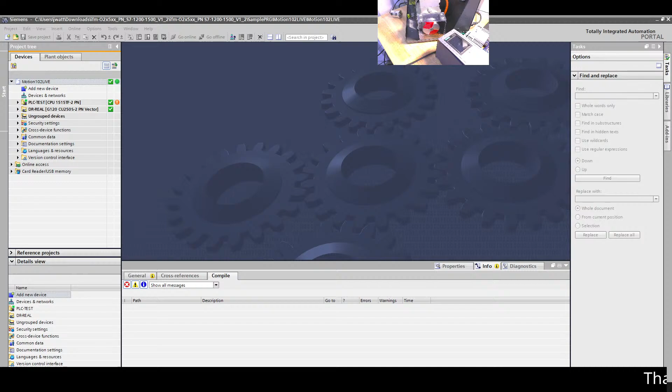But yeah, so let's jump in, and I'm going to swap over to my portal here, and let's see, do I have my face? Can I get my face? Yes, look at that. So hopefully that doesn't cover up too much of the screens, and you'll see here in a second that we're going to be doing a lot, because we're going to be talking about virtual axes. We're going to be talking about the concept of virtual axes. We're going to be implementing a virtual axes on a real system. So as you can see there, I have a 1515. Here's the device, and it works here.

I've gone ahead and cheated a little bit, because I thought I was going to impress you by setting up everything really fast and not impacting the live stream that much. Well, one, I realized that isn't that impressive, because I've done that quite a few times, setting up technology objects and drives, and B, it still took a long time.

We've got probably a good at least 2 hours of material that we're going to be going through on motion control. So virtual axes, we're going to be doing absolute gearing, looking at some tracing on that sort of stuff, and then we're going to be doing some camming, and then we're going to be talking about all sorts of other stuff in the bonus time.

So I've already got a little system here set up, and just checking to make sure that you can see everything, and clear that out.

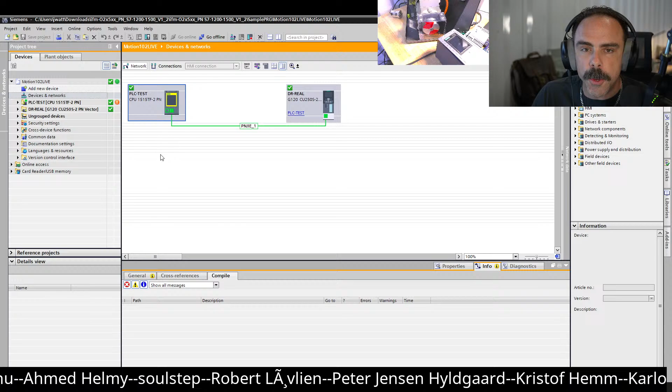So what we've got here is a 1515 TF processor. We're not going to be using the safety functionality, only the T functionality. Just if you're not aware, you do have to have a T processor in order to do all of the functions. Well, not all of the functions. You can do a virtual axis on a regular processor, but you cannot do absolute gearing and camming. And so what we're going to do...

I'm actually going to bring up something that I forgot to set up here a second ago. Where is it? Here it is, our little drawing thing. Let me make sure that I can draw. Y'all see that? Yes, sweet. Okay, got it cleared and got me back to my thing.

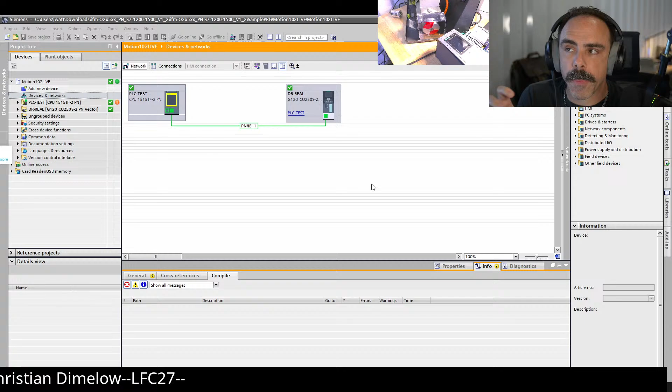All right, so again, we're going to be talking about these motion control topics: virtual axes, absolute gearing, and camming. So we've talked about in the Motion 101 class, we talked about gearing, and that would be synchronizing two motors together as if they were physically geared together. And we have a gear in function called MC gear in.

And that is what we talked about in that Motion 101 class. Here, we're going to be talking about MC gear in pos, so position gear in. Whereas the MC gear in just takes and doesn't actually locate via position, you can't do anything like phase shifting or anything like that. MC gear in just takes you, and whatever your leading axis is doing, it will just spin up and then move into your following axis, and you can have a gear ratio and everything. But I'm going to show you the difference between what we're doing with that.

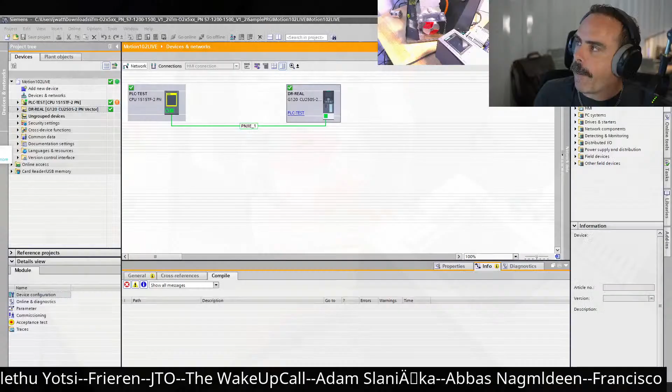So a little bit more about our setup here. We've got a G120 with a CU250S with an encoder. So you can kind of see it, I'll click over here. You can't really see it, but there is an encoder on that G120, and you'll be able to see that wheel move.

I've already got the 1500 downloaded with a basic program, and so we are going to be pulling in this here, and we're going through. I'll show you the basics program we have.

We have a leading axis technology object, and I've gone through and just done the basic setup on it, because we've gone through, and it took me a little while to tune to try to get the best out of this motor. This is a really old 4-pole motor that is, I guess, not the best of quality anymore.

So you're going to see that motor kind of hop between at lower speeds. It's going to kind of be a little bit jerky, but just know that I've worked in order to get it tuned as best as possible.

Remember, this is a G120, so this is an induction motor, a 4-pole induction motor. Very simple. But one of the things about doing these technology objects that we're going to be talking about today, you have to have an encoder. The G120 can absolutely do encoders. You have to have a CU250S. So I have a CU250S-2 Profinet version, and you can see that it is set up here.

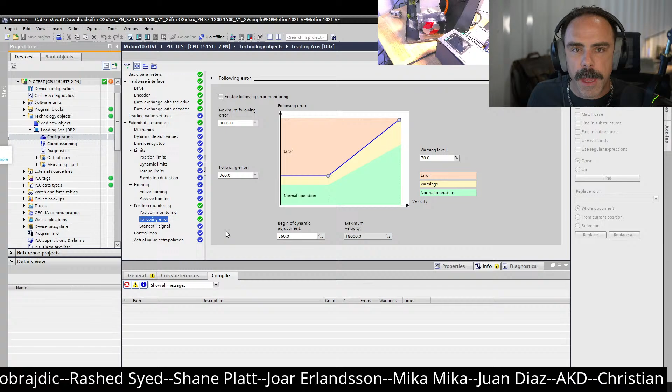I've disabled the following error on all of these, and following error is going to be one of the things that trips you up the most in getting these systems to work. Following error is the difference between the set point and the actual value. So if this blue line is the set point trying to ramp up, and for some reason your motor cannot speed up that fast, you get an increasing following error that continues to get bigger. That's what following error is, and there's a threshold that will fault out your technology object.

In a real system you would want that, because it signifies you're trying to accelerate too fast or you're under too much load, something like that. It means you're not actually following how you were supposed to be following, and that'll be very important when we talk about virtual axes, because you're assuming your motor can follow as quickly as you are telling it to.

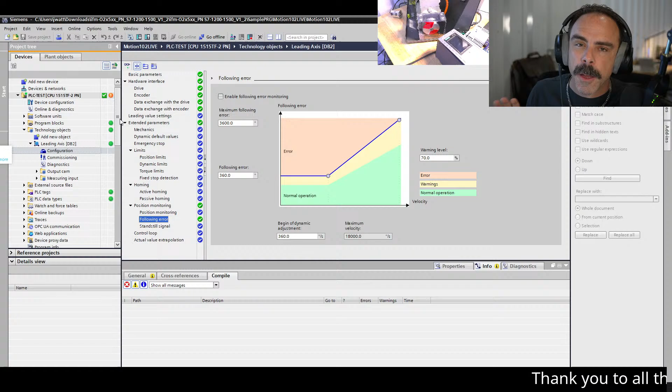So I've disabled following error on this, and I'll go through and explain some of these terminologies and things like following error, and we'll have standstill monitoring, some things like that. But in general, I'm going to assume you've watched the Drives 101, Drives 102, Motion 101 classes, so you generally understand the concepts of drives, motors, encoders, and things like that. If you're not familiar with those, you might be a little confused on the live stream, but there's a lot of information about that on other streams.

So we've got that leading axis set up, and in my program structure I have a function call called leading axis control that I'm calling from my OB1. This leading axis control has my basic MC power, MC reset, MC stop, and MC home for my leading axis. This is all the stuff you need to control a motor using technology objects. Every motor is going to have some version of these, and we're going to find out later that we need this MC home in order to actually get anything going.

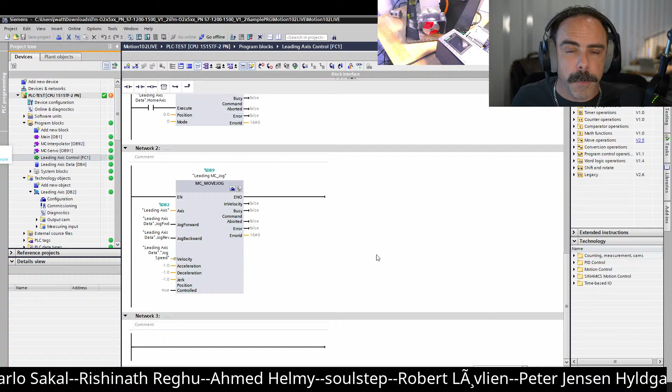What we have now is the second thing we're going to be doing in order to move our leading axis. We're going to be using the MC move jog, because one thing about a leading axis, especially the way we're going to be doing it, is it can be doing any number of things, but the concept we're using is what's called a virtual shaft, or a virtual leading axis. A lot of systems will be looking at a master value, and then you'll have multiple motors all gearing onto that one master value, so it kind of syncs up, and those multiple motors are doing their own thing.

What's really cool is that there's an analog, mechanical system, that previously, before you had PLCs and all this other technology, you would actually have to mechanically link motors together.

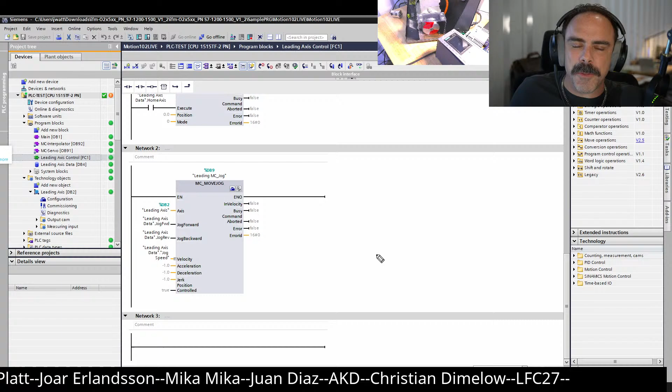One of the coolest things I've ever really looked at is a system in a very large house. It's Vanderbilt's, who was involved in railroads in the U.S. and the early U.S., and he was kind of like the world's first billionaire sort of person, or at least in the U.S. He has a house called the Biltmore, just outside of Asheville, North Carolina. If you're here in the U.S.—if you're not, who cares—it's kind of like a little castle, like a Versailles castle, just not quite as old. In the kitchen of this Biltmore building, which was built in the 1800s, there are these big mixers and pieces of equipment they're using way back in the 19th century. The way they do it is they have a big steam-powered drive, an actual coal-fired steam powered plant, and this powers a shaft that rotates.

Well, if you have like a big mixer or something down here, what you would do is you would have a belt, like a leather belt, and there would be a pulley on this shaft, and then a pulley here on this shaft, and you would literally take and loop this belt over, take it physically and flip it over and lock it onto and pull it and lock it down, tension it down.

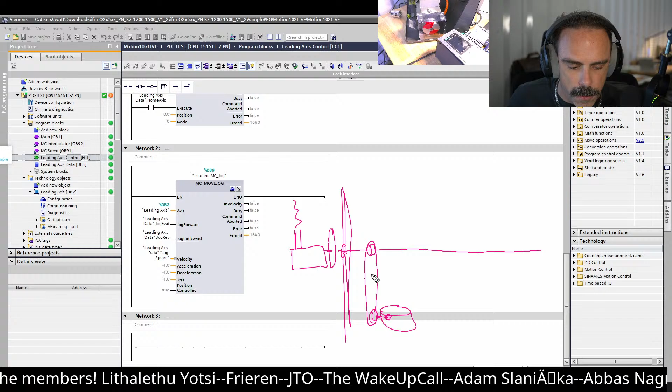And this large steam engine that was outside the building is powering this shaft, and then you can kind of turn on and off equipment, and then this would start rotating. Really cool. Cool thing about it, if you wanted to change the speed of this device, you would change the pulley. You would change that thing.

And so what you would do is you have this steam engine outside powering this shaft, and you would be gearing on and kind of syncing up and syncing off all of your equipment. And you could have multiple of these pieces of equipment running off of this single shaft.

And that is the concept that we're going to be doing, except we're not going to be using steam power. We're going to be using a virtual leading axis for this. And we're going to base that off of a real leading axis. So the first thing I'm going to do is I'm going to clear this out, and I'm going to show you that we actually have control of this motor.

And I have a little data block here where I have just connected up the axis, jog forward, all the power resets, everything is connected up into a little data block that just has all of this stuff in it. And the reason why I put it into a data block is because in data blocks, if you didn't know, you can monitor them, and then you can just double click. First time you have to say yes, and you can't hear it, but I can.

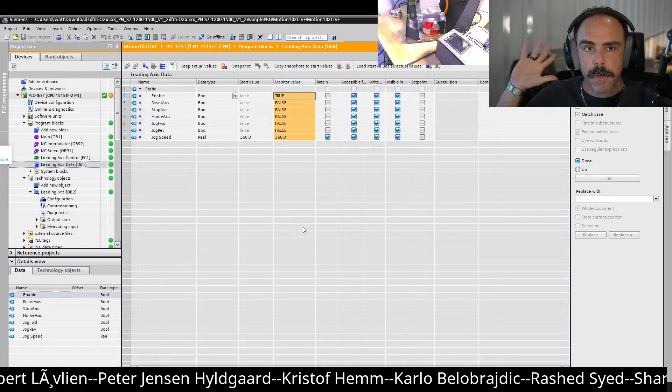But back behind me, the motor is sitting there. So kind of look over here, and when we jog this forward, there you go. It's actually moving. Look at that, chat. I actually know how to turn a motor. I'm not lying to you. I have experience.

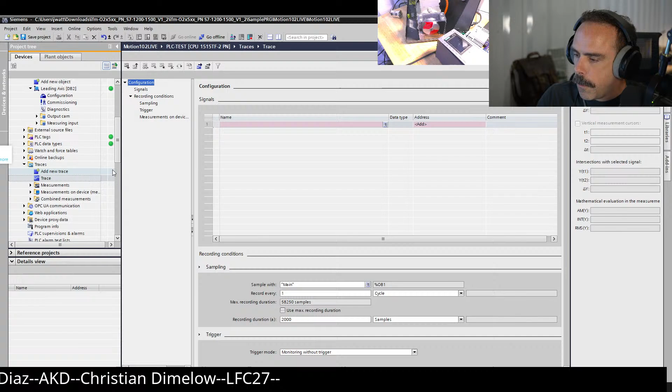So we've got this thing going, and I want to show you real quick, because we're going to be using a trace function, how to set it up. We're going to add in a new trace, and we're going to click on our leading axis, and you notice I have my details view pulled up down here. We want to pull in, well, I guess our velocity. No, I want my position. Where's my position, chat? There it is. Our actual position. We're going to drag this in for the leading axis. So leading axis dot actual position.

We're going to go to sampling, because this is very important. The technology objects, when they are running, are being calculated in an organizational block called MC servo. It is not main. Normally, if you're just running your regular block, you're going to sample your traces from main, because that's where all of your general information is getting calculated. Well, these technology objects are getting calculated in MC servo, which is independent of your cycle time. It's a set cyclic block.

So we want to make sure that we are looking at the same data, and we're just going to say use max recording, record every cycle, and you look at this, it's about every 4 milliseconds. We're going to save that.

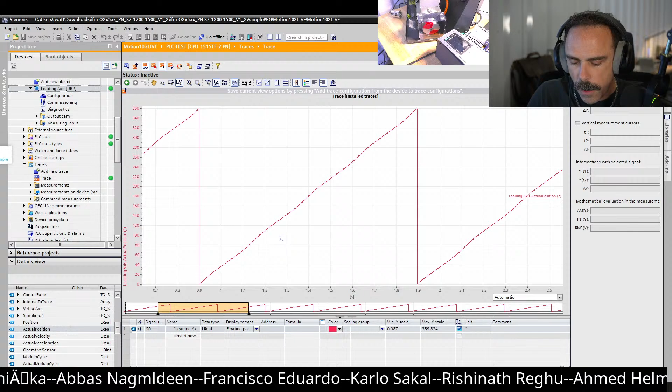We're going to download that to the processor, and then we are going to record that. And what you will see is we have a sawtooth wave, okay? And we're gonna stop it, and we're gonna talk about what this is. So we're gonna go through and zoom in on one of these, and you can see that the effect of the cogging that I was telling you about is there.

So what this is representing is on our y-axis here is the position of our drive. So remember, I set my modulo to 360 degrees. That's why you never see anything over 360 degrees, because it's always rolling over. And so you see it, once it gets up to 360 degrees, it immediately jumps down to 0 and then starts just kind of wobbly.

Remember, it's a crappy motor, but wobbly going up at a fixed speed, because we're jogging at 360 degrees per second. So we should be able to go in here and clear this out. And if this is at 0.9, this should be at 1.9, because we have 360 degrees per second. So that's how we're going to interpret this graph.

We're going to come back to this here in a second, because we're going to be doing some gearing and camming and different things, and this is going to be the core graph that we're going to look at. So what you will see in these motion control systems is this sawtooth pattern: up, straight down, up, straight down, up, straight down.

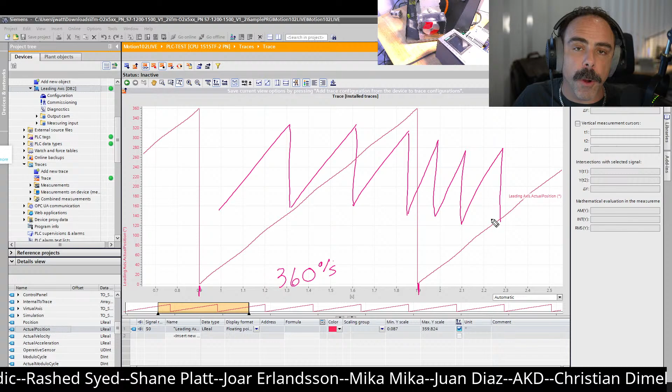So if you increase speed, you will tighten up how many sawtooths you get per second. Because if we were to double this and say to go to 720 degrees per second, we would have 2 of these cycles in the same time period that we have here. Now, that's a lot on screen, but fairly simple. Just wanted to make sure to talk about that and everybody kind of understands that.

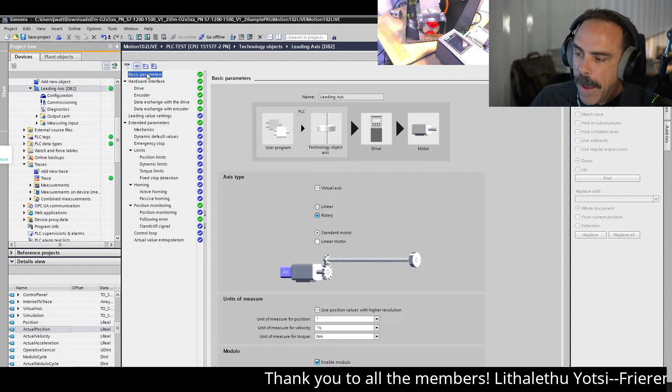So we have got this, and now we still have our motor running back there. So what I want to do is to now create this real axis into a virtual axis. And so I'm gonna stop monitoring this. I'm gonna minimize that. And first thing we're gonna do actually, is we are going to turn this drive off. And we're gonna change in our configuration, in the basic parameters of our technology object. We have a running motor set up exactly how we want it. We just click this virtual axis checkbox. We're gonna save, and then we're gonna download.

Problem is it will not let you make this change while the processor is in run. So what we're gonna do is we're gonna hop over here. We're gonna click here. We're gonna go to online tools. You can barely see it. It's underneath my face right here. And then I'm gonna stop the processor. And then that way, when I come back over here and then download this change, it actually takes it. So compile, because if I didn't stop it right here, it would say, hey, guess what? You can't do this while it's running. And so I'm gonna click start module. And so it's now back in run.

So now I wanna go do the exact same thing. I'm gonna enable this axis, and you can't hear it, but nothing happened back there. And then now I say jog forward, and nothing's going on. As you can see, look, nothing. But if I go to my same trace, the exact same trace, go online, and then activate the recording, what we'll see is, guess what? We still have this leading axis moving virtually.

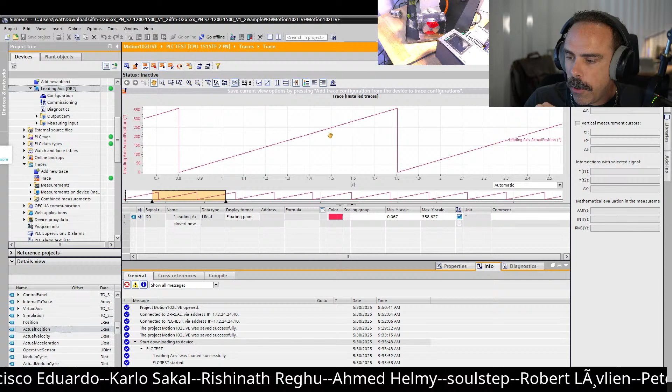So we're gonna stop this and look at this. We've zoomed in. It's still 1.8 exactly, but look, all of that ripple that was there before because of the crappy motor is gone. This is a perfect signal. So a virtual axis gives you a perfect signal. And that is very important to realize, that when you are working with these multiple axes off of a virtual master, you want to have as good of a signal as possible.

Now, sometimes you can't avoid using a real axis as the leading axis, but if it is at all possible, it is better to give yourself a perfect virtual signal and then gear on and tie off of that. Because if you have a little bit of ripple in your signal here, in a second, we're gonna gear that real axis onto our leading axis. And so it might have a little bit of instability around this axis.

Well, imagine if it was trying to follow a real axis, it would be putting the ripple onto a ripple. So you'd be adding ripple onto ripple. And so it would just not be good. So that's why we use a virtual axis if at all possible.

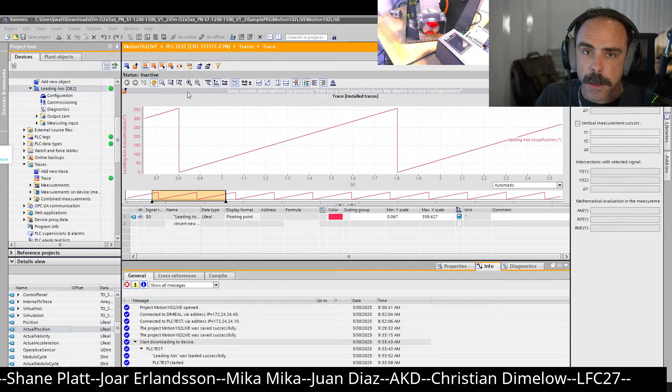There are definitely cases where you would need to use a real axis and look at the feedback from that real axis. And in those cases, you want to make sure that it is following as tightly as possible, because any error that you have in that system is going to compound and kind of make things real bad real fast.

So I'm gonna take a little bit of break. So by the way, I have a new camera and I haven't quite figured out how to get the camera to not overheat. I've probably got some setting wrong on it, so it may just kind of crap out, and so we may lose my feed on this. I'll disable it and we'll continue on, let it cool off, and then I'll get it back going. But just know that if y'all see me kind of frozen, but everything else is still going, it's just because my camera died.

Yeah, so Ignatius is another one of the long-time chatters in chat, and I call him my general. He's my greatest general, because he's out there preaching the news of Siemens, and he's talking about a real packaging machine that he recorded from yesterday, and he's put it up into our Discord. We'll probably look at it. Let's see what we got here. Yeah, when you get that up, Ignatius, I'll see about putting it up here, because it is very, very cool to look at different machines.

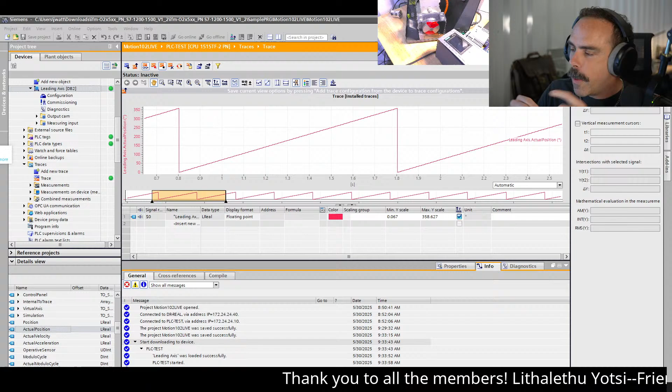May put that towards the end of the stream, because packaging machines are very much using these types of processes. You set your speed, like your line speed, with your virtual axis, and then your cutter, your wrapper, your labeler, all of those are geared off of that master line speed. So if we wanted to speed up 10 different axes, all we would have to do in our case that we're building up is change this value here. We would just have to increase that speed.

So what we're going to do now is... That's loud. By the way, this is a shared warehouse space, so it might get a little loud and you can hear stuff in the background. Oh, Ecuador, awesome. So Teddy's from Ecuador. I know Ignatius is from Africa. I think we've got some from Saudi Arabia. I know we have some chatters from Finland that's been in here a lot. Norway, Poland. And I know I've seen some from Singapore, maybe not Singapore, Thailand, and Southeast Asia as well.

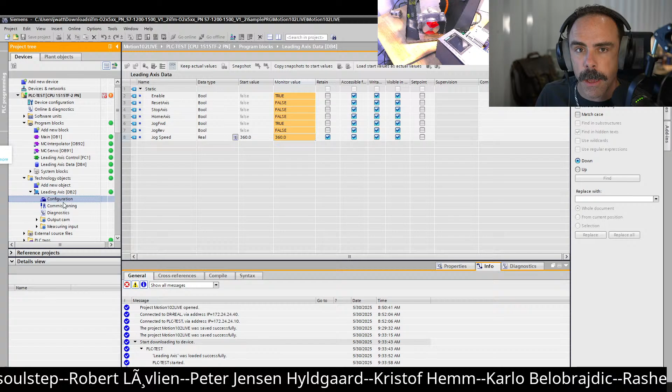So let's go through, and what we're gonna do is add in a second technology object, and because we are going to be synchronizing these objects to this leading axis, we're going to make a new object. First of all, though, we have to disconnect physically from this mechanical system. We have to disconnect our configuration from here. So we're going to go to our drive, and we're just going to select all and delete here. And because we have it selected as a virtual axis, I've just removed the connection for the leading axis from our actual system.

And so what we're going to be doing is making a new axis now. Yeah, so I'll show you in just a second when we get it geared in. We'll increase the speed. I'll show you the increasing of the speed. So we're going to call this real axis, because this is the real axis. And we're going to make it a technology object, TO synchronous axis. And we're just going to make that.

Oh, awesome. Mika, I never realized you were from Syria. That is awesome. We have some Greece. Wow, that's awesome. I love the international crowd that we have here.

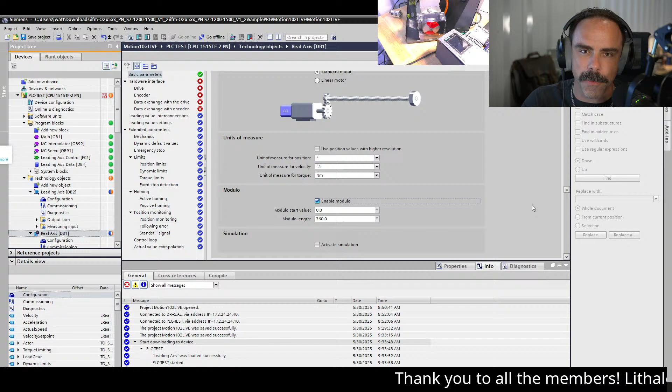So we're going to change this to a rotary axis. We want to set this up with the same modulo. It just makes life easier. You don't have to do that, but the default settings on camming and stuff don't really work that well. You'd have to massage more, and if I was having to go through all of those different settings, it would be a very long stream.

So yeah, I'm just looking over. By the way, I have this large screen over here that has all of my other windows, and I've got Discord pulled up, and I see where Ignatius is uploading the videos and everything.

So what we're going to do here, we're going to go to our drive, select drive. Because I have it already set up, we're going to have to get to the standard Telegram 3, and that's it. Remember, we're going to disable following error just to make things easier. Depending on when we activate the gearing with its basic technology, it can jump around. So that just avoids some nuisance faults.

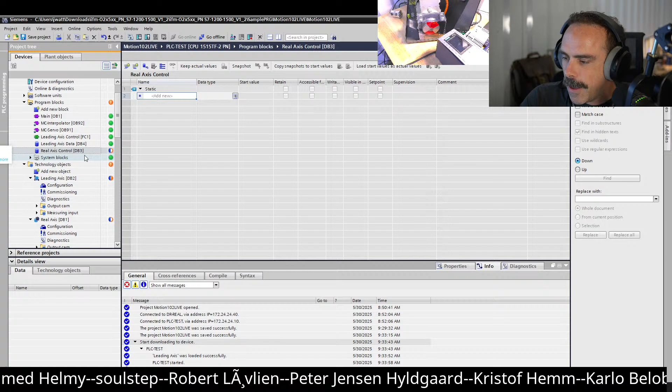Yeah, so that's all we need in the configuration. Now we're going to create a new function call called real axis control. I'm not a smart man. Always check to make sure that you actually are creating the block that you want. So we want a function call called real axis control. Okay, and we're going to have our setups. I know I'm blowing through this. I've done this many times before on other streams, and I talk about each one of these.

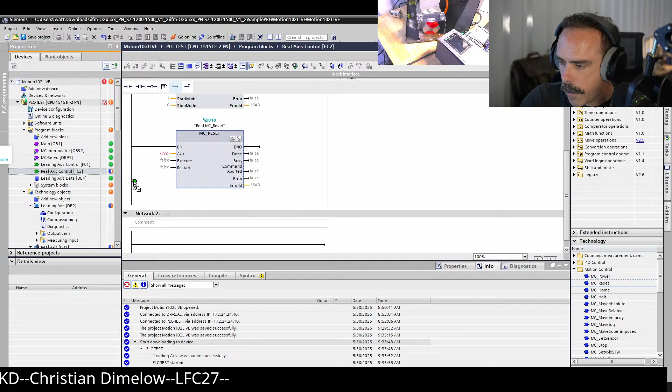But we're going to do MC power, real MC power. Always name your blocks. So always name your blocks. So real power, reset, home, and stop. So MC power, MC reset, real MC reset. Home, real MC home.

I'll show you in a second where all of these data blocks are being created. If you're not familiar with what I'm doing here, I'm creating instances of these data blocks. You can make your own function blocks. It's pretty cool stuff. Lots of videos that I've done. So this is MC, oh, I did halt. I want to do MC stop, and there's a specific reason why on this real axis I want MC stop.

Because when you're working with gearing and camming, dadgummit, I deleted the wrong one. MC halt doesn't necessarily cancel a pending gear-in move. So if you mess up your settings and you're trying to gear in or cam in and it just sits there waiting, MC halt doesn't clear that move, and you can get some faults. So use MC stop if you're working with camming and gearing, because it can actually stop that pending gearing move.

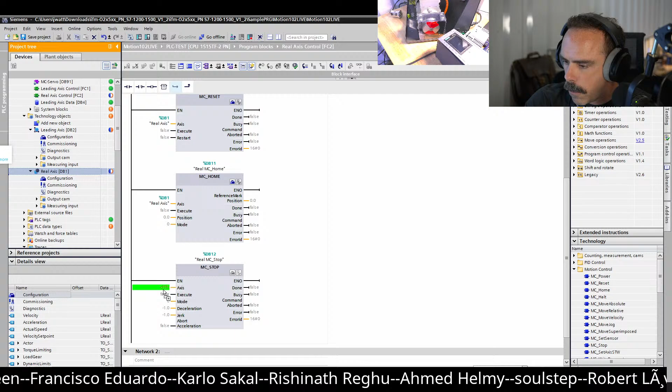So now we're going to populate these blocks. I'm going to get this out of the way and drag my real axis into all of these blocks. Now, I need to populate these enable signals. So I'm going to make a Control-C, Control-V of this DB4 here. I'm going to rename it.

Let's see if I can do this online. Nope, can't do it online. So I'm going to go offline real quick, because I need to change this to real axis data. I'm going to go into the properties of it and change general. I'm just going to click up here. It gives you the next available data block, and good to go. Now we're going to download all this, because consistent downloads.

Awesome. We've got some awesome group here. India, Egypt, just great. I love it.

Oh. Cannot be active state. Oops. So we're going to go online. We're going to go to our leading axis. Did I not?

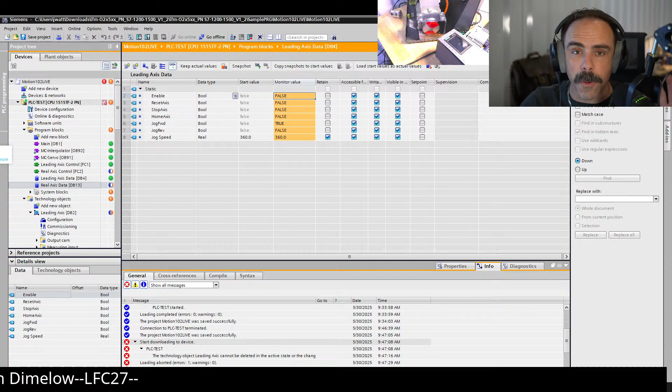So I still have my leading axis going. So in terms of technology objects, a virtual axis might as well be a real axis, which is pretty cool because you can just flip that switch and change it from virtual to real.

Lucid, you missed a lot. Not really. You missed me going through the introductory. We've got a couple of axes here. You missed me swapping a real axis to a virtual axis, and we're just now getting our setup back to where we are going to have a virtual leading axis, and it is going to be,

of course, okay. I don't know why. I got a lot going on, so I'm overlooking stuff. So now maybe I can download this. And then we're gonna restart this. All right, so now we got these going.

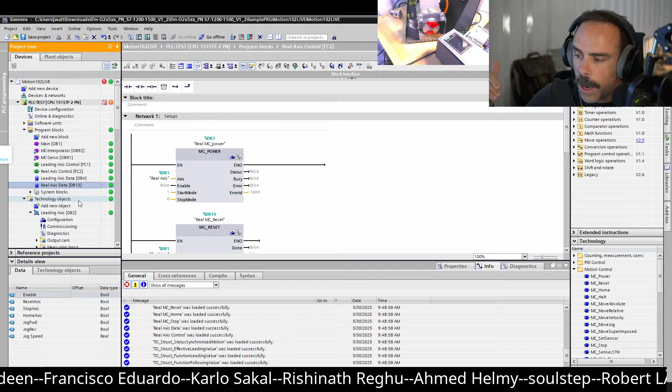So we got real axis, we got enable, reset, stop, home, jog forward, jog, because we know we're gonna want those, right? So now we're gonna go into real axis control. If you notice how I'm doing this, I'm selecting my data block over in my left-hand side, in the project tree, and then in my details view, I'm able to look inside that data block and drag and drop out of that details view. Pretty cool little spot.

So MC power, we're gonna put enable to the enable for it. MC reset, MC home, we're gonna home, MC stop, we're gonna stop. So I got it. Looks good, right? Stop, stop, home, home, reset, reset, power. All right, let's download this.

Now, one thing to note is that we made this FC, but we have not put that FC into OB1, so let's drag that in, because otherwise our code will not execute. Now, hopefully I haven't messed this up so much that we can go into, this is in our real axis data, and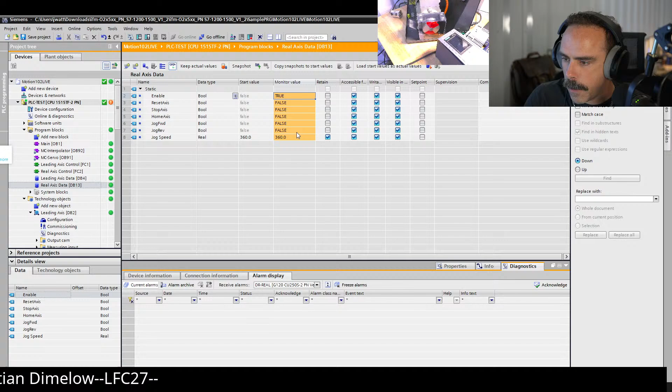that didn't make sound. What we got going? Oh, come on. Pulse it out. Not coming on. Why is that not coming on? Real live, this shows you that even... oh, I know why. I gotta do this. Ready? There we go. Makes a sound now. All right, so we don't have a jog forward, but we've got control now.

So that's all we need to do. Pretty quick. That only took, what, 10 minutes to set up that axis. So we've got our leading axis we're not going to be messing with anymore. I'm going to clean up my screen a little bit. We're not going to go into OB1 anymore. Our leading axis, we're not going to be doing anything anymore. We're working in the real axis.

So let's go through now, and I just want to get our jog block. Let's do our jog block just to show how easy it is to get everything going here. Real jog, because we want to get back to where we were before, and that should get us there. Is that gonna let me? Yep, it'll let me do that because that's just code.

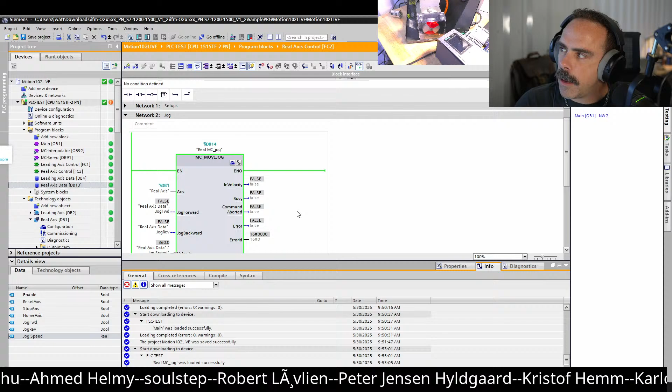So making changes to your actual technology object is where you're having to start and stop the axes. But adding in just code to FCs, FBs, that's all runtime changes. So we're making big changes in runtime. If you're not familiar with the power of Siemens and the fact that you can make a lot of changes at the snap of a finger with one download, it can catch you off guard how much you can change online. So we're going to look at the jog. That should be everything there.

One thing to note, this position controlled on the jog, that's important because in order to gear into something, we're going to want that position controlled move. Only problem with that position controlled move is it keeps up with following error. If you disable that, it doesn't keep up with the following error.

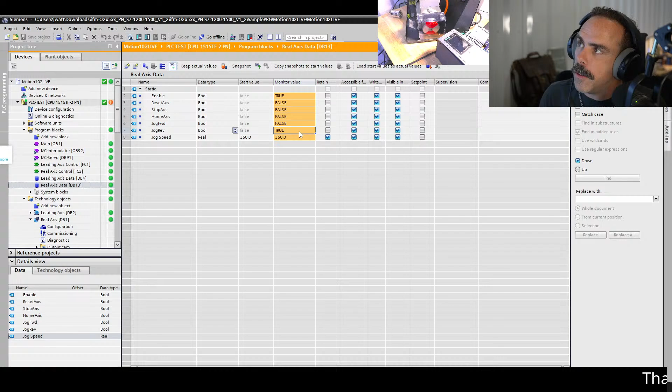Yes, Lucid, it's actual hardware. You see it over right there? That's real stuff. Look, I'll prove it to you. We're gonna go into our real axis data, and then we're going to jog forward. And look at that. See that, Lucid? It's jogging. And if we turn that off, it stops. Jog it backwards. It's jogging backwards. So we're good to go there.

So now we have complete control over our real axis again. We have ways of messing around, because I went through and tested everything yesterday, but I can always mess things up. So we have got, what are we gonna do?

Let's update our trace now since it'll be offline and not monitoring. Now we'll go to our signals, go to real axis, and add our same position, actual position. There it is, we'll drag this in here. We're gonna download that and start recording.

Get our leading axis going, jog forward, look at our trace. It's got some stuff going on, real axis. Jog forward, it's got some stuff. What's up Rishinath? Just random stuff, not synchronized, not anything.

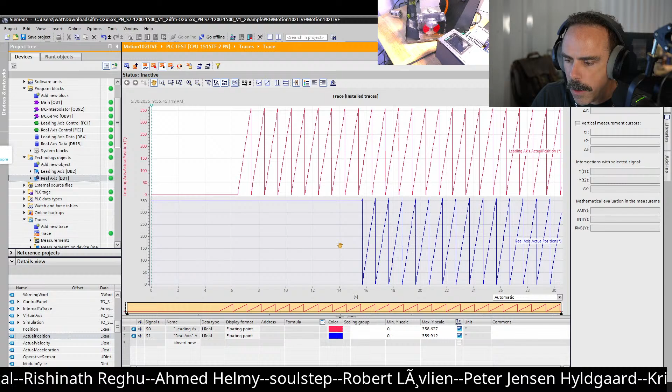Let's go through and see if we can get these signals on the same trace, or the same value. Dang it, I should have looked this up. If you're in chat and know how to get these overlapping on each other, how do we get them on the same thing? Put that in there.

That's a good question. The difference between position and actual position, I'm not exactly sure. Right here, what we have is the difference between the position and actual position. It's going to be something in the actual technology object. Sometimes that could be the position calculated by the technology object versus what is actually being read in by the encoder.

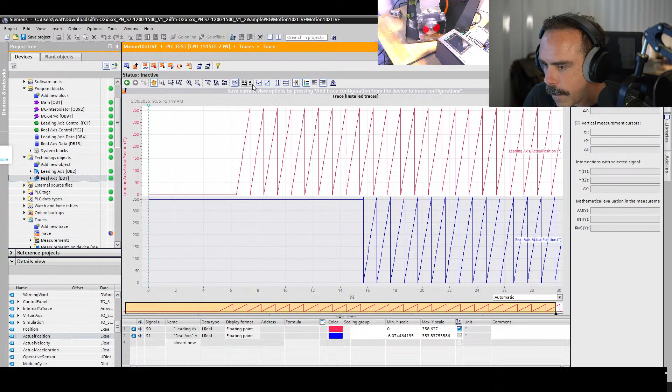It's in the middle of your taskbar icons. Superimpose in the middle of the taskbar icons, group them together to overlap them. Shows you how much I use the chat. Like, do this, like that. There we go, there we go. Ah, there we go, Ignatius got me there.

All right, so this is the craziness that I wanted to show you. Now let's zoom in and see, even after many years, why are you not zooming in? So what we got is, I wanted to zoom to a very specific area, it does not like this. But anyway, you can see that these are definitely not synchronized in any way. They're running at the same speed, but not the same synchronization. Because eventually they are synchronized, running at the same speed, they stay synced.

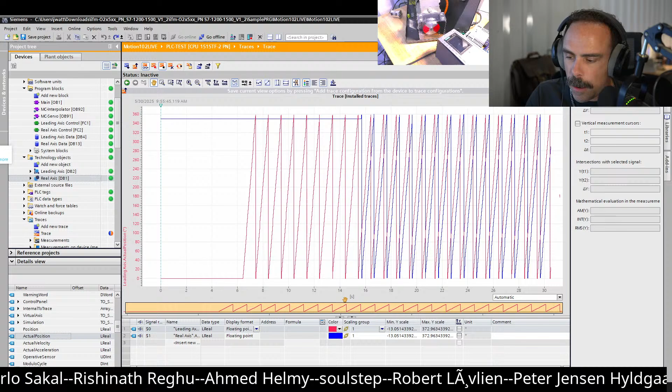But if I were to change, for example, my leading axis speed to double and run this trace now, you would see that they would no longer be synchronized at all, and it would just be quite a mess. Why is it not letting me auto range? There we go. So you can see this is quite a mess here. But you can see our leading axis, which is the red, is moving twice as fast as our blue axis, the following axis. Let's not belay that, or go on any more with that. If we want to speed up the real axis, we can do that here, 720, and you can see it moving faster over there.

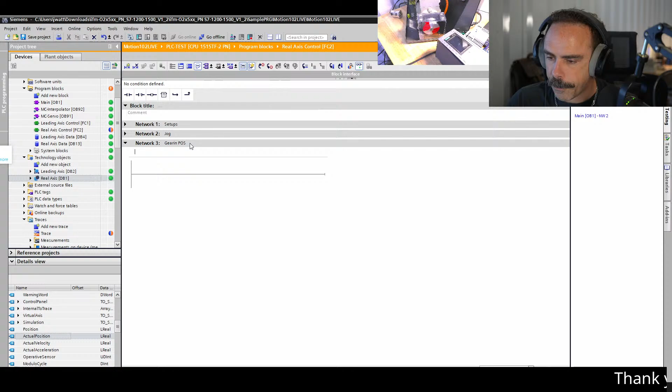Now let's go through and do the next thing. I want to gear these together, actually geared together. So I'm going to stop my real axis, go here, stop this, disable it. Then we're going to go into our real axis control and forget about jog, and do gear in pos. So our new function we're bringing in is instructions, synchronous motion, gear in. Gear in basically just runs the two axes at the same speed, kind of like a speed controlled sort of thing. Gear in position, we are using the position of it. That's why we have to have that jog function in position control mode, because we are going to be gearing in. So real MC gear in pos.

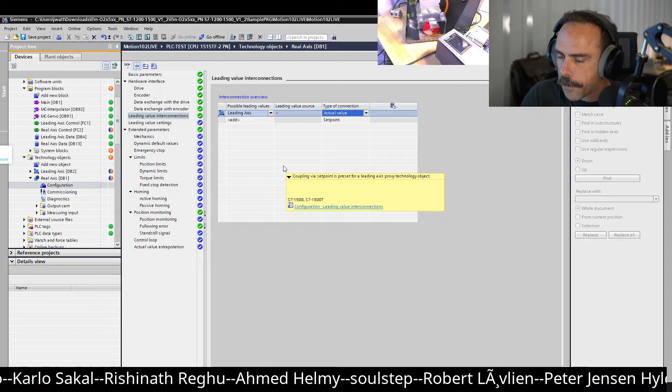If you notice a difference between these two, you now have a master and a slave axis. One thing we need to do that I forgot, in the real axis you have to tell what are possible options for this master axis. If we just go through and say leading axis, real axis right now, this would actually complain, it would probably fault out our processor or something, because this real axis is not configured with our leading value interconnection. We need to go add leading axis type of connection. For this we can do an actual value because our leading axis is a real, or sorry, a virtual axis. So it's all virtual anyway. We're gonna do that, actual value there, save that and see if it'll let us download. Who knows if it will.

So right now it's complaining that this is on. So now let's download.

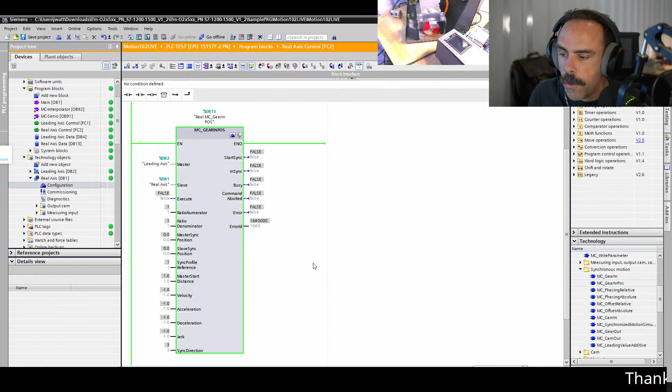Gear in position has a couple of extra settings versus the regular gear in, basically these master and slave sync position settings. Because we're gearing in based on position, if you had two axes like this, you can say I want my zero position on this axis to sync up to the zero position of that axis, and it'll think and then start moving. Kind of cool there. So that's what master sync position and slave sync position is.

The thing about it is we can actually just use the default settings as long as our leading axis isn't going too fast. Then we can sync up.

But so we got 360, and then let's get this going. Let's start that up. Should be jogging. Let's check our trace.

Oh, probably because it needs to see. Let's just do this.

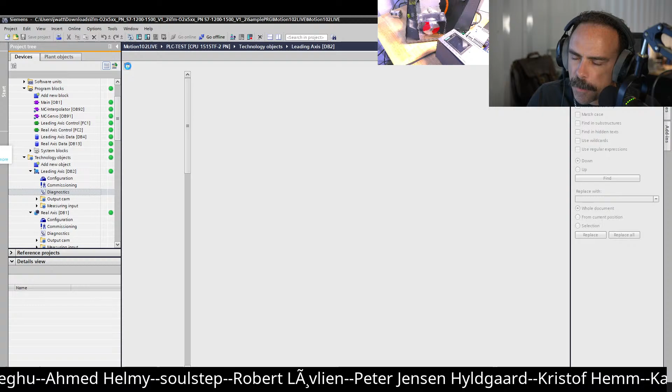Another way you could go through and look at this is if you go to our leading axis, go to the diagnostics, go online. You don't have to use a trace. Under diagnostics, monitor motion status, you can see that the position set point is changing, and you can see that the actual position is changing. So it is going, you don't have to use that trace function.

Because when I grouped all those together, for some reason I can't zoom to a thing. Anyway, we're gonna do that. So let's set this out.

So now what we want to do is go to our real axis. We need to be able to execute this. So let's go into our real axis data and create a value here. Add a row called gear in.

We want to make sure it's a Boolean. I'm gonna download that. It's gonna reinitialize, which just means that all of the stuff in this block will go back to the default values.

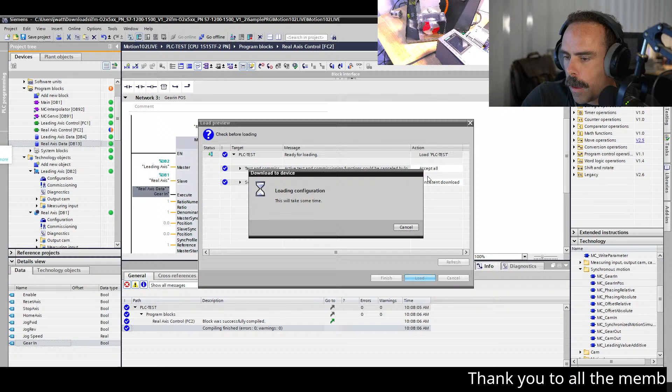So now we have this gear in, and so we can go here, execute our gear in, download that change. You'll notice that's a consistent download, no problem there.

Now we're gonna go back into our real axis data. We're gonna enable our axis. It's on, I can hear it. One thing about this though is we need to home our axis. We have to have a home position. It has to know where it is. It has to be homed in order to be able to do this gear in.

And so let's just try it. Let's try the gear in. And look at that, woohoo! It's working. So now that it's geared in, let's look at this trace and actually run it.

Cool, right? So let's zoom in. And you can see that it should be pretty close. And it is. This is annoying, isn't it? So you can see that it's actually pretty close. And you can see that it is lagging it a little bit.

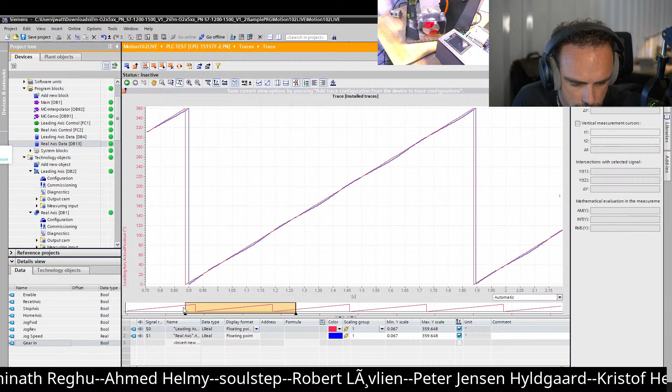Let's go through here, you don't have much difference between this. If we were to really zoom in, really tight, you can see there is a little bit of ripple here, a little bit of a gap. And that gap is just the fact that you have a real axis that has its quirks, in this case, like decades of use. And it's not exactly able to follow it like as well as you probably would want to. So that's what this little gap right here is. So that gap between there and there, that is just the fact that it's a real axis.

So one of the things about it though is you can see that it's pretty close to following. It looks like it's off a lot here in that little spot, but it's really not. It's really closely following. So what I want to do now is go through and change it.

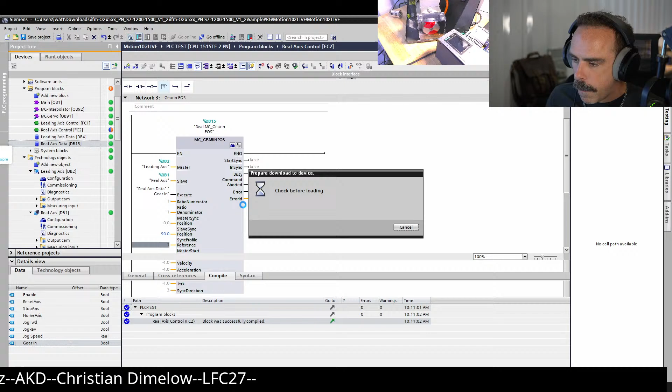Let's change this slave sync position to say 90 degrees. I wonder if I can, and what this is doing is it's putting a phase shift into this. And it's still running, right? So let's see if we can do a positive edge. Let's make sure our trace is running. I want to capture this.

So let's look and see what we got here. Look at that - it did a phase shift. At this point, you can see where I actually executed the gear in, and it was almost perfectly aligned. But what it did is it essentially moved that following axis and shifted it back so that when you go to 0 on the leading axis, it is at 90 degrees on the following axis. Pretty cool stuff. So you're putting a 90-degree shift, and that is what a 90-degree shift looks like - it phased backwards 90 degrees.

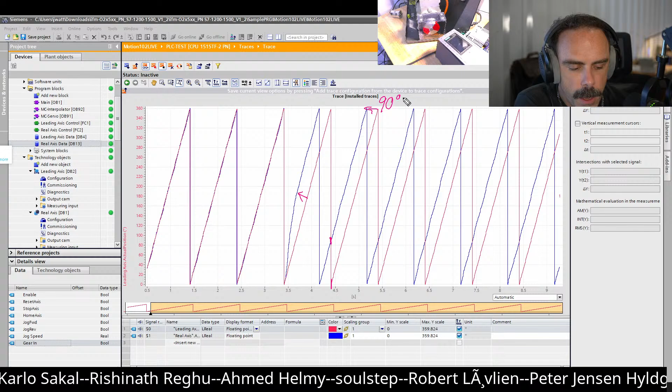And if you were to change the master sync position instead, it would do the exact opposite. So if you were to flip those and change the master sync position to 90 degrees, it would take the crossing line of the slave - instead of crossing here at 270 degrees - it would cross down here at 90. So wherever 90 degrees is, it would cross the master axis there. So if I were to flip those and re-fire that gear, it would shift this backwards to that. Now there's a lot of nuance into the settings of what's actually going on here.

What direction are you shifting? That is all in this thing here called the sync profile reference. This sync profile reference determines, okay, am I going to actually turn the motor backwards? Am I going to allow it to speed up? How fast am I going to be accelerating? All of that is built into this sync profile reference right here.

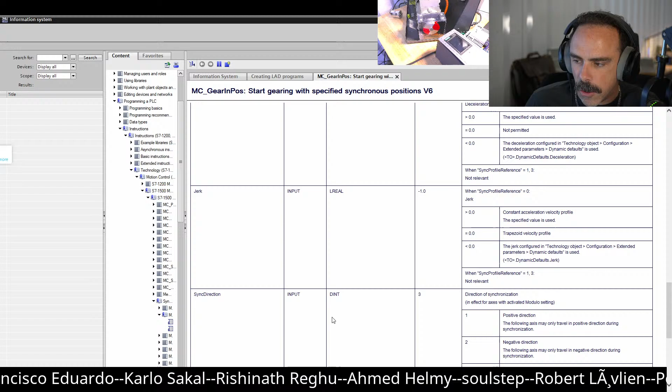But the sync profile reference, back to the gearing, is kind of how the motion actually works. So if you go through, you can always click on this, hit F1, and it pulls up the help file eventually. For some reason it didn't pull up the proper help file for this one - I don't think I had the right one. There you go, I didn't click in the right place, but it will actually tell you about that sync profile - sync direction, sync profile reference. It'll tell you about all that in the help files. Just click on your block, hit F1, and it pulls it up.

So now, that's camming - or not camming, that's gearing. And we are barely, we're like right on an hour in. Chat, we might actually do this. This is awesome.

I've got a meeting with a very cool Siemens technical guy here in Atlanta. Siemens USA is based out of Atlanta, and so I kind of have the advantage of being able to hang out with some of the guys there. But I'm meeting up with him at 1 o'clock, so I got to leave out of here at noon. So I want to make sure to get through all of this, and then we can chat about random stuff.

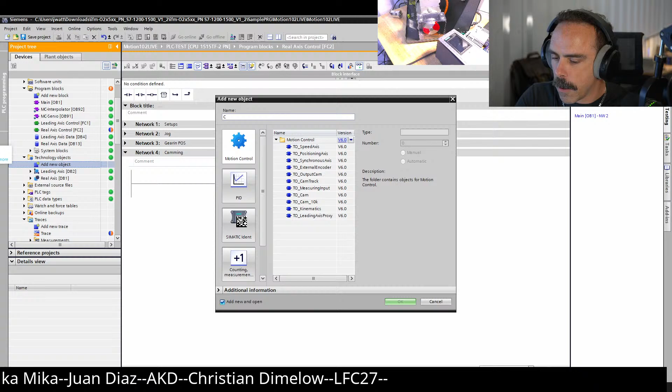So now we are going to add in camming. All right, y'all ready for it? So we talked about in a previous stream that in order to have camming, you need to have a camming technology object. So let's go through and do this first. Let's add a new object. We're gonna call it our demo cam. It is going to be a technology object cam, and we're going to open up this file, and we're going to create just a real simple cam profile, and we're going to make a sine wave.

So what I'm going to do is make this axis that's sitting back here turning geared on, which, by the way, I want to show you something. If you notice, I can turn off this gear in before we get away from this, and it still moves. An MC halt would stop this motion, but if for some reason it doesn't gear in and it's kind of sitting there waiting to gear in, an MC halt will not stop that motion.

So I'm gonna show you this. MC stop will stop it. And then if we want to gear back in, it should gear back in. All right. So MC stop actually physically stops your axis. We wanted to do that because we are going to be doing this demo cam, because I want to put a sine wave onto this motor. What that means is I want it to oscillate back and forth from 90 to negative 90. So let's build a sine wave here.

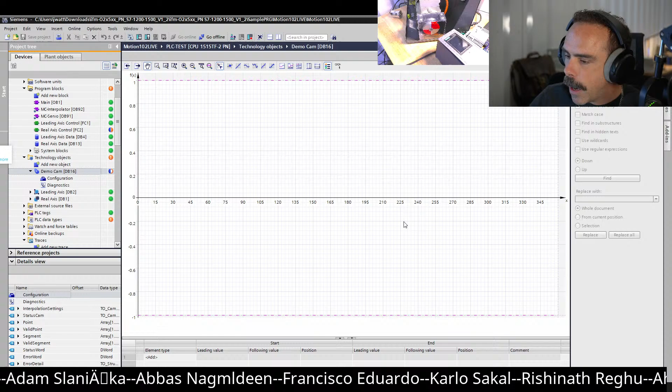We're going to add a point, and you can edit them with the features up here, but I'm just going to do this because I know what point. My leading value is 0. My following value is 0, correct? That's how sine works. Add another point, and it will add in a transition. So at 90 degrees on my leading, at 90, not 900, I want it to be 90, right? And then 180, 270, yep. So at 90, I want it to be 90 degrees.

At point 90, I want it to be 90. Point 270, I want it to be negative 90. And then at point 360, I want it to be at 0.0. Okay, that looks right. It definitely did not take me a little while to figure out how to do that yesterday.

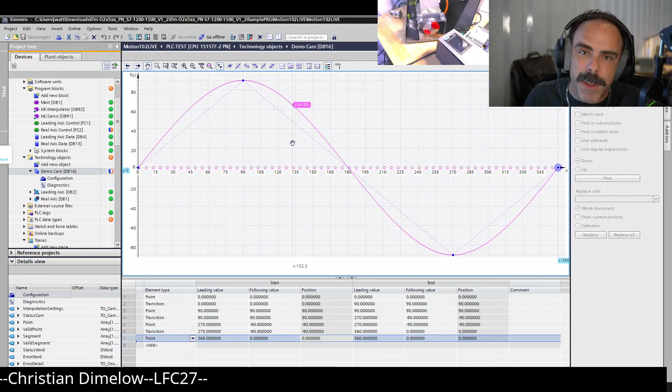So don't worry about your cam profile. You can absolutely go through and add in points and tweak these things. In a previous stream, in the bonus time, we worked with these and showed how they tweaked out, and we may do that in a minute. But what I just want to show you here is the process of making your cam and then making it so your real axis can gear into your leading axis and follow this cam profile. So what we got here is a cam profile. It's good to go. We're going to download that to the system.

Yeah, see, Ignatius, this is what happens when it takes me 2 months to get ready to do a stream. So the quality, much better. But I joke, but there was definitely a lot of stuff going on in the past 2 months that prevented me from even being here. So I'm glad to be back.

But let's go now into our real axis function blocks or function call, and let's bring in the synchronous, or sorry, camming. So let's go into the cam function, and you notice, all right, yep, it's gone.

So my face is gone for a minute. Probably gonna have to let that cool off, and my face will be back. But what I'll do is I will bring up a bigger block of this. So face is gone, but whatever, we got this. All right, so you don't need to see my face.

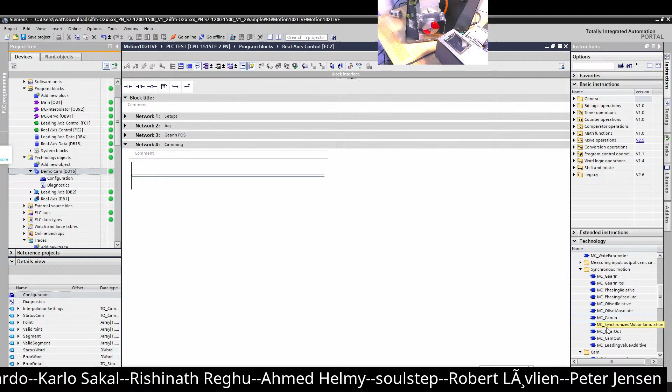So one thing you'll say, okay, you want this function MC_CamIn, and you can find that in synchronous motion. And you're very tempted to just say, hey, just bring this in, real cam in, and be like, oh, this is real simple. This is real good. All right, I've got my master is my leading axis, my slave is my real, my cam is my demo cam, and then, oh, I need to execute. And so let's go here. Let's add a new value, cam in.

Download that. You're real tempted to just do this, and the reason I know you're going to be real tempted to do it is because I did it yesterday when I was preparing for this, and it doesn't work. This doesn't work, and I'll show you why. I'll show you what you get so that you can see the error. So when it happens, you know what's going on.

So is our leading axis still moving? Yep. Okay. So we've got this downloaded and ready to go. All right, that's on. And so you're like, okay, Jason, just like everything before, well, I will say I need a sync profile of 0 because you'll get a different,

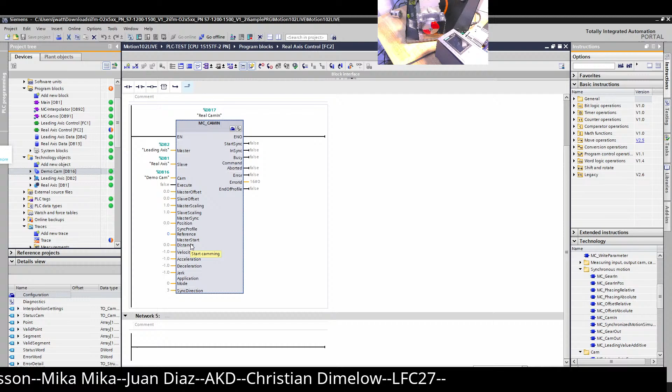so the default uses this master start distance here, and that master start distance is how long you have in order to actually get moving and get going. So sync profile 0 just uses the default data in order to cam up, and it calculates everything and gets you going. So let's download that change and accept that. And then now, we're going to get an error here. All right.

And so I'm going to say cam in, and it did nothing. It didn't do what I thought it was going to do. Why did you not? Oh, because I'm stupid. You want to know why I'm stupid? I'm just so excited about this stream, chat. I didn't bring this over in here. I'm so excited to show you how it breaks that I didn't tie that in.

So all right, now y'all may not be able to hear it, but it's sitting back there behind me making its obnoxious noises, and I'm gonna go cam in, and it's off. And you're like, what just happened? It just shut off. Well, let's go to the diagnostics on our real axis. So diagnostics, and we're going to say status and error bits. And look at that. We've got an error and it says user program.

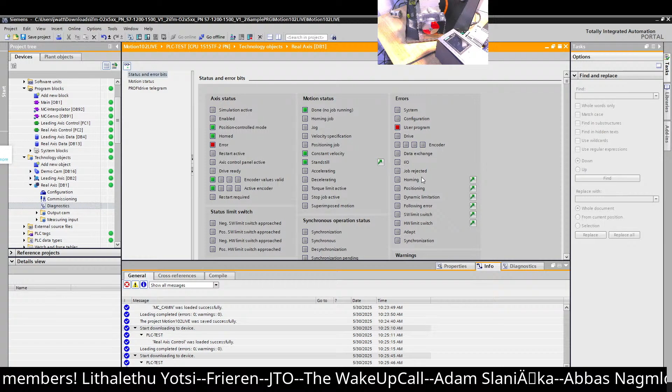And it says you've done messed up, chat. That user program means that it's not something in the configuration. It's not something in the motion. It is something else in the user program. So what could we have in our user program, which is right here? Well, we have a cam that has not been interpolated. And I thought yesterday when I was working on this that it interpolated it when you compiled it. Well, chat, I was wrong.

Real cam interpolation. And so interpolation is just simply taking all of these points that we did on our demo cam, and then this pink line is the interpolation. But really this cam just consists right now of 4 points. This pink line hasn't actually been created. And so what we have to do is we have to link our demo cam to the cam.

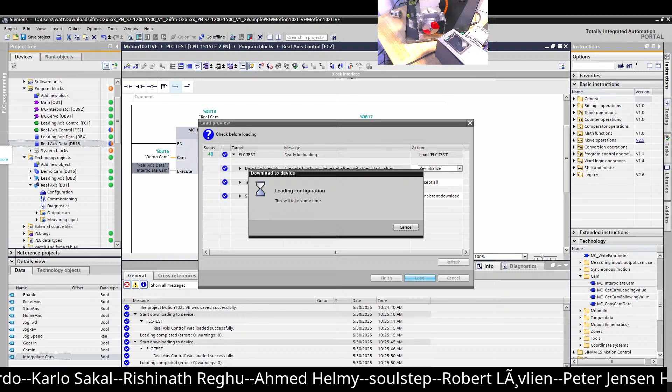Then we're going to add in another value, interpolate cam, and we're going to download this. Except after we do this, because I want it to work. So our leading axis should still be moving. Yep, it's still chugging along. Oops, didn't mean to close that, but whatever. So now we can go back and we can try to get all of this reset back up.

So we don't have anything moving, so let's reset our axis. Let's enable our axis. And it is on, I can hear it back there. So what I need to do now is I'm gonna home my axis, and that's setting the 0 point. Now, I'm going to interpolate this cam. And we can go here and see that it's done. It's done, chat. It worked. So now hopefully when I click cam in, it starts working. And look at that. It kind of worked for a second. But what happened?

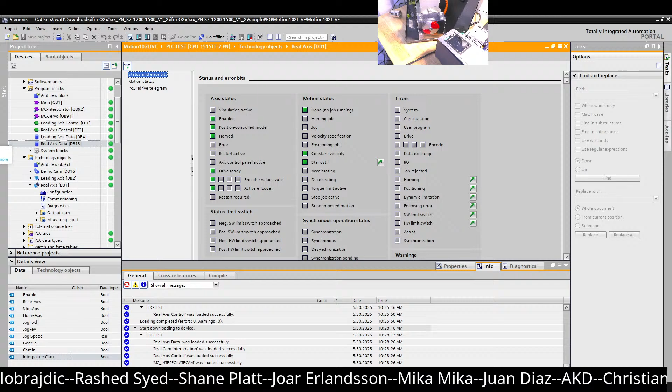Chat, what happened? Let's go to our real axis. Diagnostics. Let's stop our axis. Go here. Chat, why is it not working? Oh my gosh, my computer is dying a slow death. Interesting. What's going on, chat? Let's diagnose. Diagnostics on the leading axis, make sure it's still moving.

It's almost like the leading axis stopped moving. No? It worked. Alright, let's go. Try this again. So we've got cam in. Oh, chat, I know what's going on. It's working, but the configuration on our cam is not configured correctly. So let's go to properties on our cam because is it here?

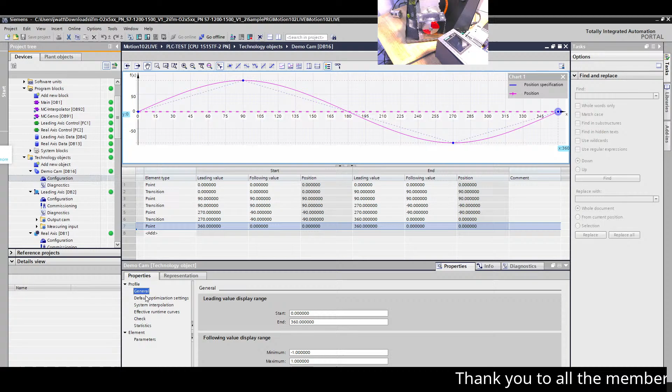Yeah. Supposed to be right here. Where is it? Because we have to set this up as a... Right here. Gosh, that's so annoying. So, optimization, interpolation. Where's that setting? Where's the setting, chat? So we have to set this up as a cyclic cam so that it actually continues to move.

I don't know why this is not here. Again, I went through all of this yesterday and set everything up and deleted all of it because I wanted to impress you, stream. And this is what I get. My hubris. Oh my gosh. I'm glad you can't see my face because it's like shocked Pikachu. That's exactly what it is right now.

Cam continuity. This is supposed to be... All of this is fine. All of that's fine. Where's... Oh, come on. Where was that? Oh, I'm getting annoyed now because it was setting up. Oh, I know what it is. I apparently had... It's this MC cam in here.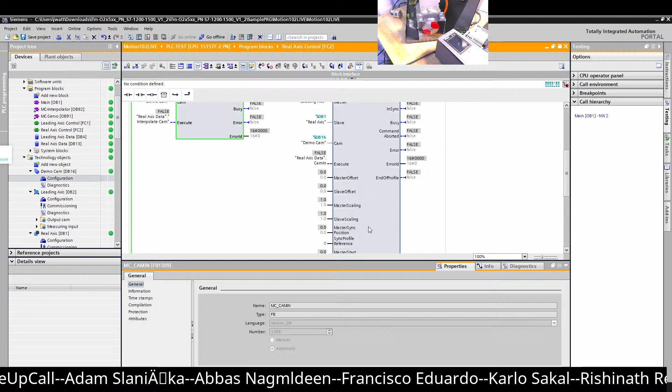Let's go here because I forgot that there is another setting here, because what that cam did is it ran through one time and then that's it. I want this to be a continuous cam. And so which one is this? Where is it? It is... What is it? Come on, chat. Where am I looking? Sync profile, synchronization using... Nope. Nope. Application mode. There it is.

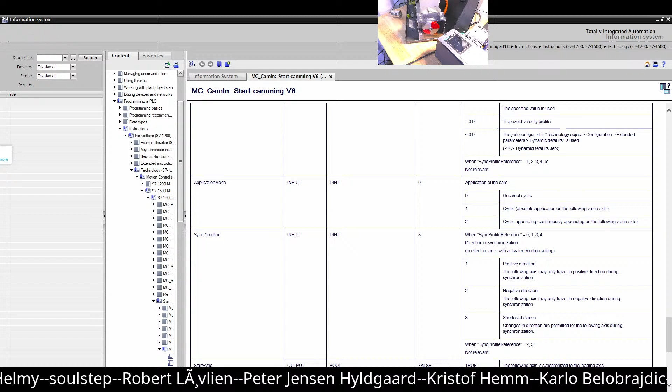My goodness, chat. Let's change that application mode to a 1. I forgot that I had done that. Our application mode, this has to be here because everything was working perfectly, chat, until it wasn't. So now we're gonna download this. Now, let's go over here and we shouldn't have to...

Chat, look at what we have. There you go. At the exact same time that my music ends. I'm gonna let y'all sit here for a second, because I'm gonna bring back the full screen camera. Because guess what, chat? This is absolutely what we're doing. So this is a cam, and this is actually running back and forth.

Yes, it's so exciting. I know there would be tons of people that would look at this like, wow, it's going back and forth, but it's actually following our cam, and that's kind of the very basics of what you would need in order to get this camming function going. I'm proud of it, chat. Isn't it cool?

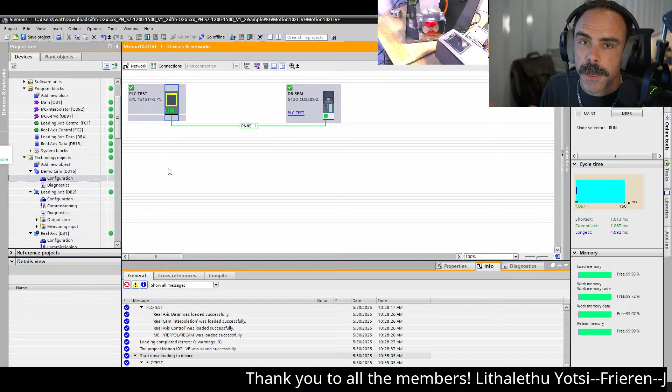So the CPU model is a 1515 TF. For this level of automation, you don't need a 1515. They have a 1511T or a 1510T processor, but you do need a T processor in order to do this automation, because the advanced motion control features are only available on the T processor. Now, I'm not using any of the F, that's the safety processor. You can see here it's yellow.

So Lucid asked a really good question, and I got some time to modify this cam profile so that it looks like maybe something that Lucid is talking about. So, a stamping press is a big piece of equipment that you put some sort of mold in, like this, and then you have an axis that has kind of like a cylinder on it that is connected to this.

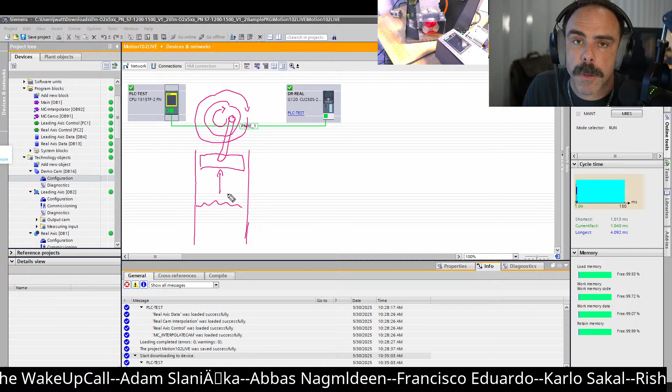So as this moves around, this would go down and then up, right? So this would go down and then up. So what we're going to do is change this cycle; we're going to clear this, and we're going to make a stamping press cam. And we're going to change this cam into something that we're, I don't know, let's kind of work through it.

And this is all kind of off the cuff. I haven't really played with this, but it is something that you would actually use it for. So what we're going to do is say that this stamping press is, let me draw this over here down in this bottom corner. So the stamping press, we're going to call this 0 degrees. And in the stamping world, this would be called top dead center.

If you're a mechanical or a car guy, you know that there's top dead center as well. And you also have a totally different understanding of what a cam is. But a cam is doing this same thing. Like a cam in an engine is changing the valves. And it has these little rollers. And depending on the shape of the actual cam shaft, your rollers for your valves will sit and ride, and those valves will open and close based on that cam. Anyway, let's talk about stamping press.

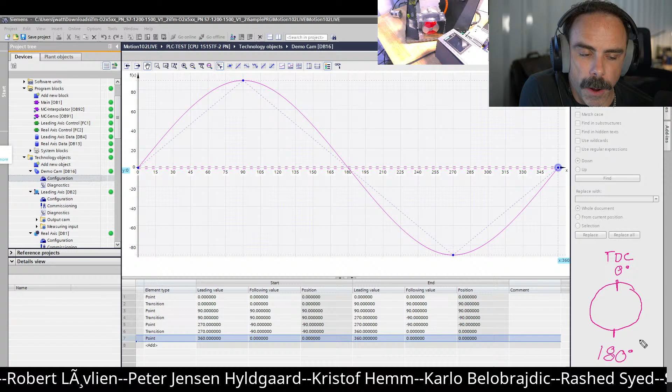So this is going to be 180 degrees. And what we want to design is a stamping process that is called a pendulum process. And so we want it to go down to 180 degrees and then back up to 0. Okay, so let's modify this profile here. So as it rotates through, halfway through, at 180 we want this to be at 180.

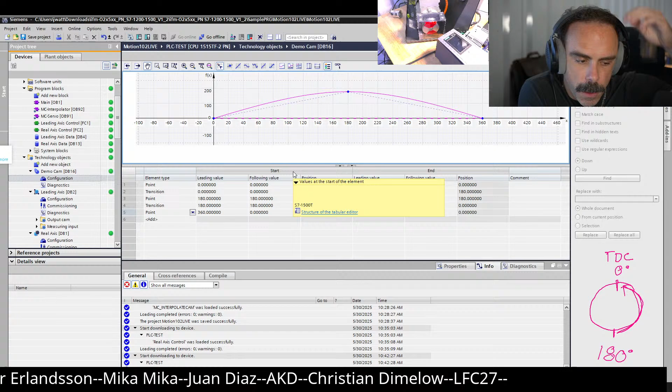Okay. Doesn't really show the... Is there a way that I can just zoom out? Okay. So at 180, we want it at 180. And now, obviously, that doesn't quite work. And then back at 360, we want it to go to... We're actually going to delete this point because we don't need it. At 360, we want it at 0. I know this looks really rudimentary, but this is actually how you could do a pendulum style stamping press, where you're going down and you're not carrying all the way through. And so this would be a hit and back up.

So let's go there, and now let's go back to our real axis data.

And unfortunately, if y'all are chatting, I can't really see my screen behind me when I'm using my tablet. So I'm sorry if I'm not paying attention.

So we want to interpolate this cam, and then let's see what it does. If it's in the middle of a cam and I want to put it on a different cam, I'm going to do that now. Nothing. Okay, so I'm going to have to stop, do a reset, I probably don't have to reset, and then cam back in. And so it actually may have been the same, because I realized that I'm doing a 180 degree shift. The slight difference I probably just couldn't notice, but it's doing the same thing. This cam action, where I'm only going to 180 degrees, you can kind of follow it.

Let's pull up the screen to the workbench here. You can kind of follow that if you were looking at that top line. I guess it works better if you're looking at it from the perspective of horizontal. So it goes from horizontal, goes 180 degrees, back and forth. Now, let's go back here, and let's change this up to where there's a little bit of dwell. So when it hits that 180, we want it to dwell for a little bit. So let's add in another point like here.

And then I want to actually move this point back some. So I'm going to grab this point and just move it back to where in our cycle, so from about 160, and then I want to add in another point because I don't want it to go over 180. I want it to stop at 180 and dwell. So what we're going to do, we're going to add in another point back here.

And so let's tweak these. At point 160, I want it at 180. At point 200, I want it at 180. All right, so this would be a pendulum style stamping press with a dwell. If you're putting enough pressure on that material, it's actually going to sit there and deform the material. And some materials you want to have a dwell time, some materials you can just do a simple hit.

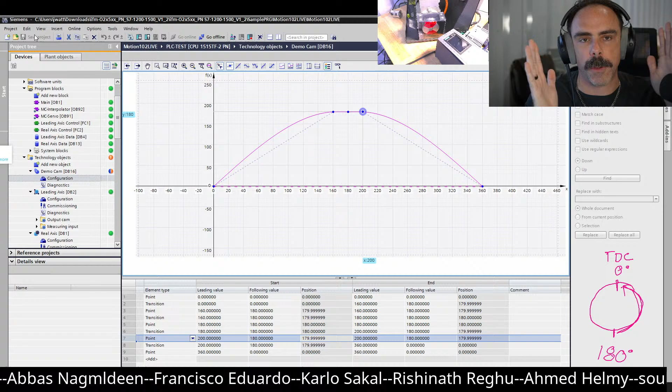And so now let's go through and download that change. We're going to accept, and we should be able to tell the difference pretty significantly. Let's interpolate this cam and see if it cams in onto the new cam. I can't tell. All right, so let's see what our trace looks like on this. This looks like it's still doing that original cam, doesn't it? Yeah. So we probably need to do the cam out function, because you can see that it's doing this 180, negative 180 sort of thing.

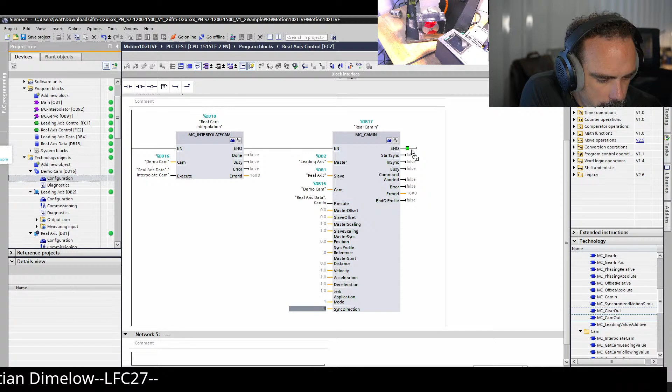So let's see if we can get this thing cammed out. I want to go into this cam out. Go back here. So there's synchronous motion, and there is cam out. And I'm pretty sure that I need to do this. So real cam out. And then it's the slave axis. We'll see. So let's look at this. Save. And it might be I'm doing these out of order.

So let's go through and add in another here. Let's just do this right here. Whoops. So unprofessional of me. I'm sorry. Cam out. Okay, we're doing this. So now let's download, because it might be that interpolate cam doesn't work if it's in motion or whatever. So we got that. Oh, because yeah, we redid this.

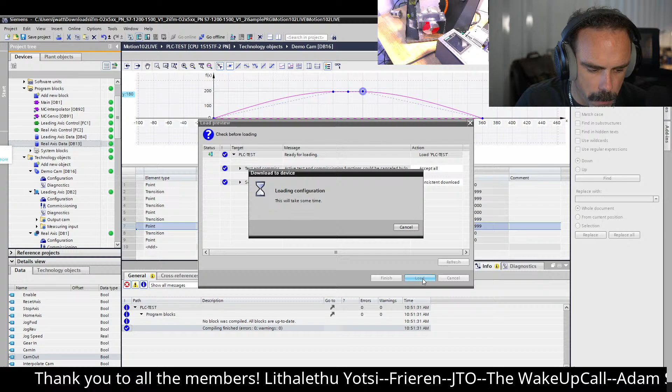So let's reset this. Let's cam out. Let's look at our demo cam. Let's compile that. Didn't need a download. Apparently it does need a download. Let's go back here. Execute. All right, let's go to real axis. Let's interpolate the cam. Make sure that it says done. Okay. So now let's enable and then cam in. There we go. That's what it was.

All right, chat. That was all it was, just that we did it out of order. We have to cam out. Let's go to the workbench screen. So you can see now it's accelerating a little bit quicker, speeding down to it, and then sitting and dwelling, and so that's the motion that you have here. And we'll swap back over here to Portal.